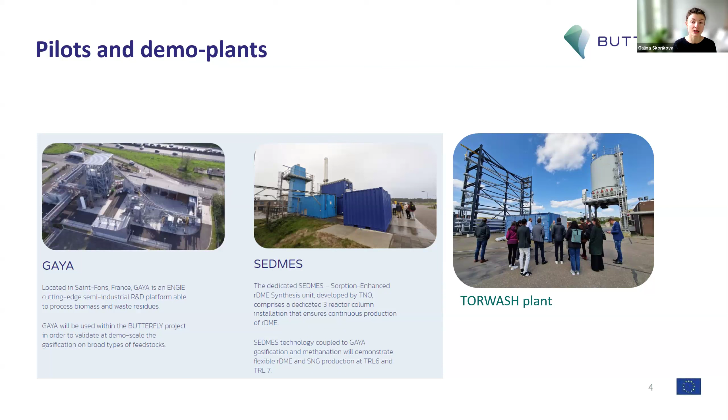And the SEDMES sorption-enhanced DME synthesis pilot that you can see in the middle is at the moment located in Petten, the premises of TNO in the Netherlands, but it will be moved to France to be connected to the GAYA platform. You can also see the TORWASH plant. We have visited it recently. So basically, this is a feedstock pretreatment, which is also already at high TRL.

The levels of flexibility. So conceptually, we have 3 levels of flexibility in this value chain, starting from the feedstock supply. We believe that our concept is primarily focused on the decentralized production, meaning that we would like to facilitate the hubs for circularities and local for local. We want to source feedstock from a certain region and utilize the products also in the region or in the neighboring region, but within 100 kilometers away.

And depending on the region, of course, where geographically it is located, the sources of biomass can be different. It can be lignocellulosic, it can be industrial waste, or it can be upgraded wet organic residues. So depending on that, we are also convinced that different modes of gasification could be more suitable. So in this case, we will also select which mode is the most beneficial. And the next level of flexibility comes in the core process, where we can tune the ratio between renewable DME production and synthetic natural gas production. And it will highly depend on, first, availability of green electricity to produce hydrogen, and second, on the market pull.

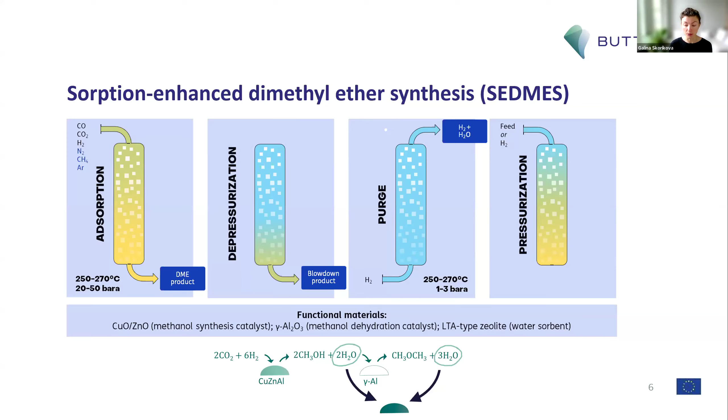So due to the equilibrium shift, the selectivity is very high, and the yield of DME could be much above 75% per single pass.

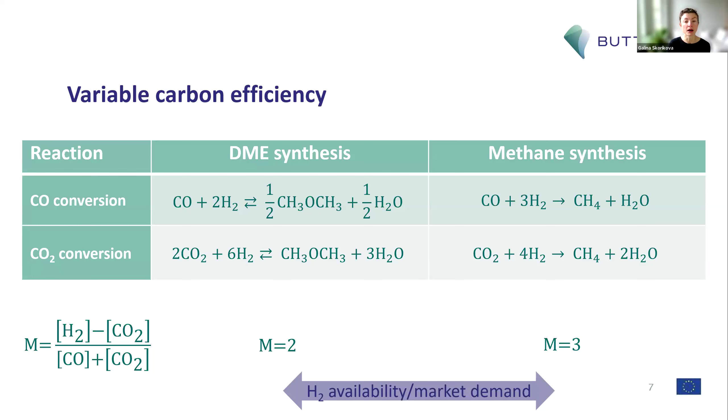So here a little bit more science. How do we choose, how we tune between SNG and renewable DME production? We already know that the ratio between hydrogen and carbon, which is also known as M module, is determining how much product you will form. DME requires an M module of 2, and methane requires a module of 3, meaning that it requires more hydrogen. So depending on the hydrogen availability, we can produce more or less SNG, and also depending on the market demand, as I've said earlier.

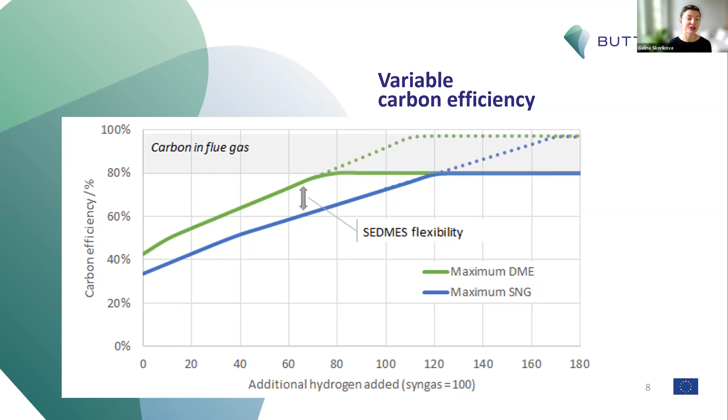Unfortunately, we are all aware that there is excess carbon in biomass, so you either capture and store it, or you use green hydrogen to utilize it.

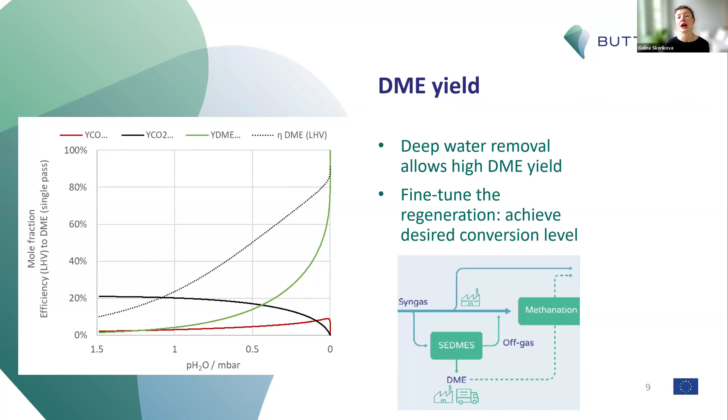So here a little bit of nuance on DME yield, how we can basically tune between methanation and DME formation: more DME is produced when the bed is dry. It's very sensitive to the partial pressure of water. When the partial pressure of water is close to zero, we produce very high, close to 100% DME. But once it increases and the bed becomes wet, we produce much less DME. So by playing with the regeneration of the bed, making it more or less dry, we can tune how much DME we produce and how much CO2 just passes through and goes to the methanizer instead.

So a few details on work package 2, work package 4, and work package 5. Work package 2 is dedicated to technology de-risking. For example, in Petten, we already have 2 laboratories. One includes the SEDMES pilot, and the second includes the indirect gasification lab together with gas cleaning. Our ambition is to connect these 2 labs to demonstrate the technology lineup at TRL 5 and to de-risk all possible complications that we could face when we move the pilot to the GAYA platform. We're already building this connection, but unfortunately some activities were paused. I will mention it later.

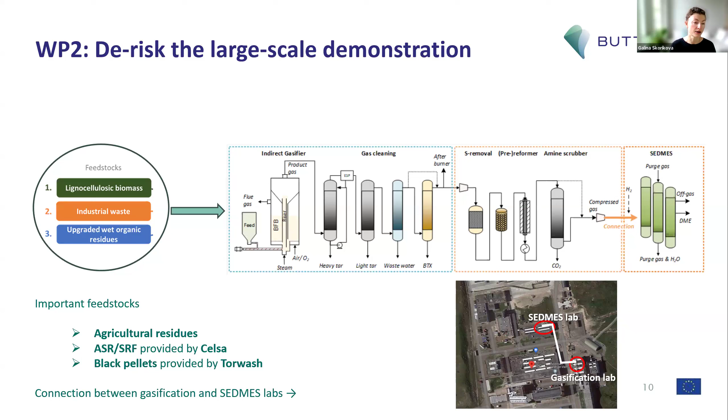The feedstocks to be tested next would be waste wood, cereal straw, flax, and black pellets.

Work package 5 is focused on market identification and technology exploitation. Here we have set up a framework, and we are curious to learn what would be the most beneficial locations for our first-of-a-kind plants. We want to know the feedstock origin, how it is sourced, the best plant size based on feedstock availability, who would license this technology, how far we need to distribute the products, by what means of transport, and who will eventually use it. So what should be the product specification and quality.

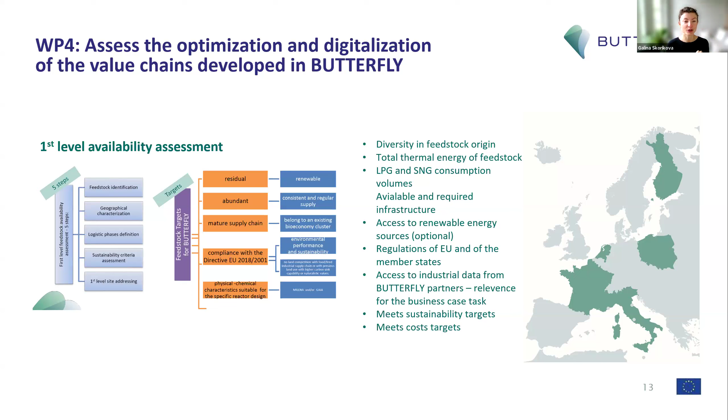So we are working closely with industrial partners to define the best location and to optimize the value chain. So the ambition of the project: after we have demonstrated the technology at TRL7 in 2027, we would like to upscale it to 32 megawatts feedstock inlet in 2030, and that will allow us in 2035 to build already 5 plants of typically 4 megawatt scale. So it's a relatively medium scale, not that large, but decentralized.

And the final ambition by 2050 would be to build 250 small to medium scale plants for renewable DME and SNG production. So due to the time constraints, I need to finish here, but I would like to welcome you to visit our website because there is plenty of information on the project. Unfortunately, it has been on hold for a couple of months due to the partner change and also due to some uncertainties when SEDMES plant could be moved to France to be connected to GAYA. But we are very optimistic that in January we will restart it again and realize our ambition.

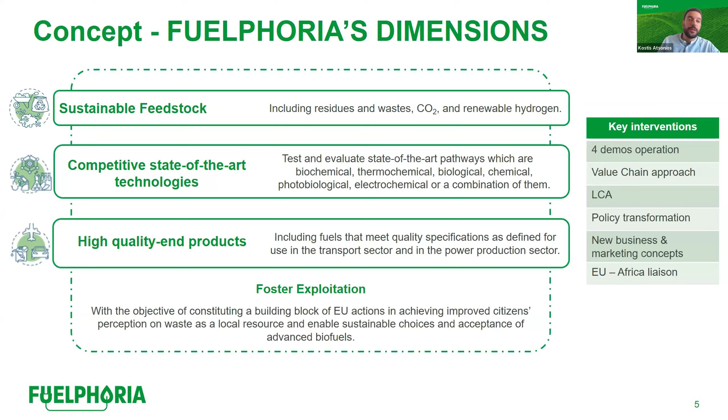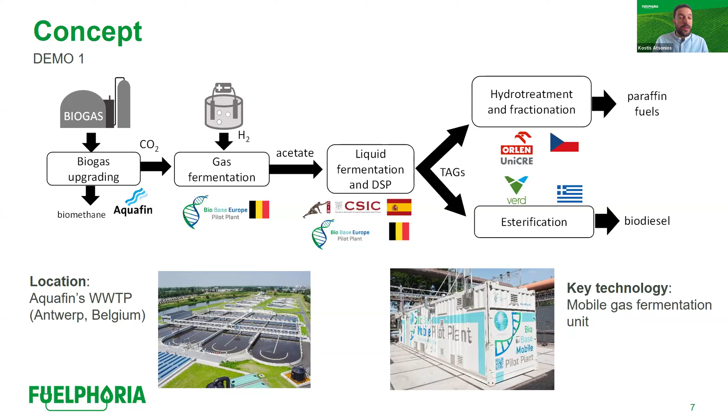In these slides we also see the location of the wastewater treatment plant, where in 5 or 6 months the mobile gas fermentation unit from BEP that you can see on the right side will be installed and coupled with the biogenic CO2 coming from the biogas upgrading unit.

The second demo is located in Spain. This demo deals with the valorization of CO2 coming from a fermentation process in a winery at Somontano in Spain, owned by Viñas del Vero, a winemaking company. This CO2, which is in quite high concentration in the off gas from the fermentation process, is the feedstock for the production of synthetic methane. CO2 is treated and purified, and it's hydrogenated using hydrogen coming from a water electrolysis unit that is powered by a photovoltaic field that is also installed at the Viñas del Vero premises in Spain.

The technology that is employed is a catalytic reactor, with a feature to maximize the production of methane. In this demo, leading the overall coordination of the demo activities is Circe, and also the University Rovira i Virgili is responsible for the development of the methanator reactor.

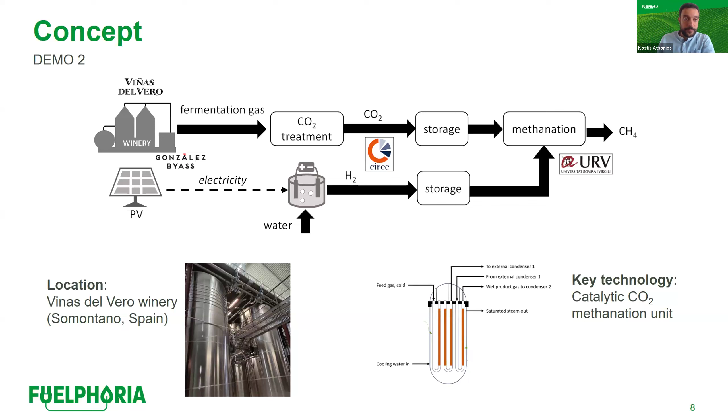The third demo is located in northern Greece, in Thessaloniki. Like the first one, it also deals with the valorization of CO2 coming from a biogas plant, but as a feedstock it not only uses CO2, but also digestate from the biogas plant in order to cultivate and produce microalgae using high rate ponds. After cultivation, the algae are harvested and the lipids are extracted, and these lipids are sent to Verd facilities for esterification and the production of biodiesel. As said, the location is the biogas unit of Lagada in Thessaloniki.

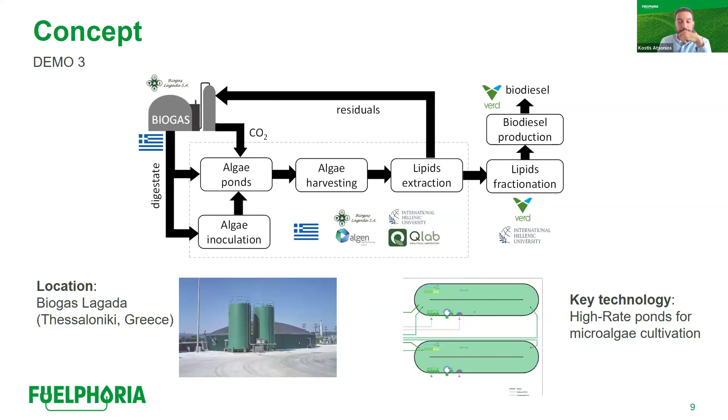And the fourth demo is the valorization of urban biowaste from a waste management plant using a highly efficient and improved technology for the hydrolysis, saccharification and fermentation of this feedstock for the production of bioethanol. This concept aims at the minimization of the waste effluent streams, where the remaining solids, which mainly consist of vinasse, are used as a feedstock for anaerobic digestion and production of biogas, biomethane, and digestate.

And the CO2 coming from the fermentation is hydrogenated in a catalytic reactor for the production of light alcohols, methanol and ethanol. The location and the main demo activities are in Perseo facilities in Valencia, and CSIC facilities, the second branch for the production of synthetic light alcohols, in Madrid. The key technologies in this demo are the bioethanol reactor that is able to valorize sugars coming from urban biowaste, and the ethanol and methanol synthesis unit using advanced catalysts.

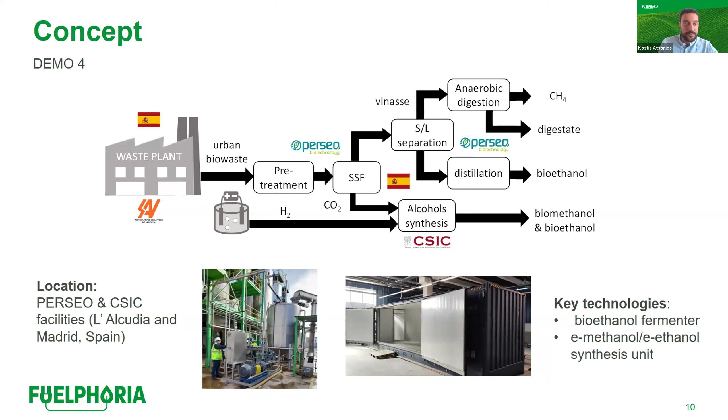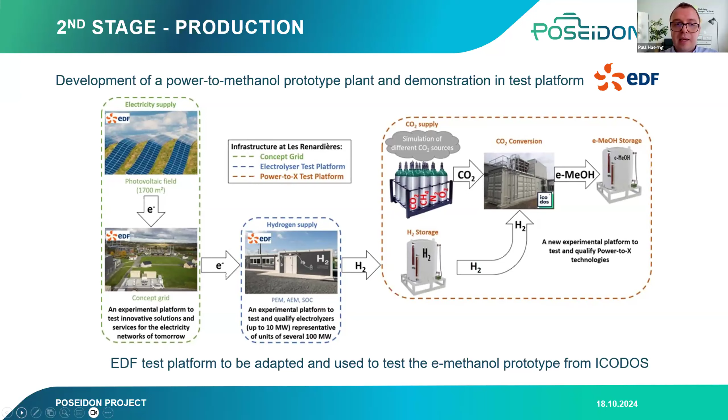And complementary to these activities, we'll also have research partners that will develop models to extrapolate the engine test results to multi-cylinder engines. So we will be then able to see if the fuels we're producing with our new technologies are compatible or, let's say, meet the standards for these types of engines and ships.

And also what I forgot maybe to highlight before when speaking about the prototype plant of ICODOS, it also relies on an innovative concept combining CO2 capture and methanol synthesis. This highly performant plant allows to reduce OPEX and CAPEX, and we hope that in the future this plant will be in the EU and help to produce renewable fuels for the EU domestic market.